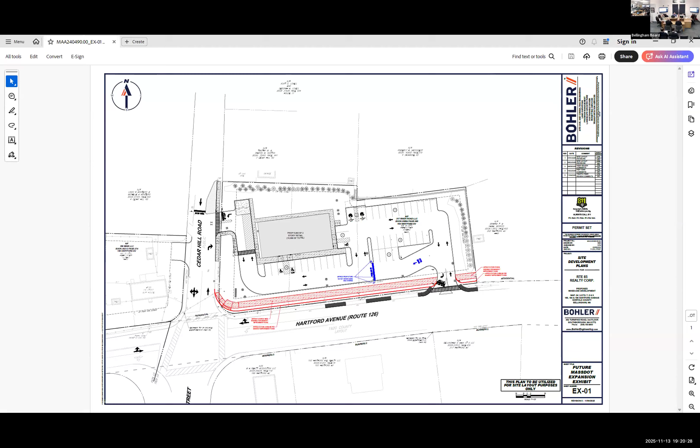So I think one of Bob's concerns was, if we'll call it the red, and that future gets installed, it becomes a tight turn if you were traveling from plan left to plan right to then exit the site. That would be kind of a hard hairpin to do.

So at that point, without making any real changes to curb lines or anything like that, we could simply direct that section of road to be one-way traffic. You'll see the arrow in blue, and direct any cars that need to exit around in a clockwise direction, which could be done simply with paint striping and signage.

We don't want to do that now as the site exists, because it doesn't make sense, and I don't think people would listen to it now, because it's more natural to go straight. But we just wanted to show that in the future, if that was widened, we have the ability very easily to add striping and signs to make that traffic maneuver easier.

I'm sorry, why wouldn't you do that now? Because I think people wouldn't listen to it, to be completely honest - it's inviting when you go that way and you have a wide area for a turn. I think it would confuse people, and you'd have some people frankly going against the one-way traffic. Whereas in the future, when that roadway is widened, it's a difficult maneuver, so it's not inviting at that point.

Yeah, and I'll add to that as well - right now we have the proper queue that's required. I believe Bob would agree with that. Jason, do you want to touch on the queue aspect?

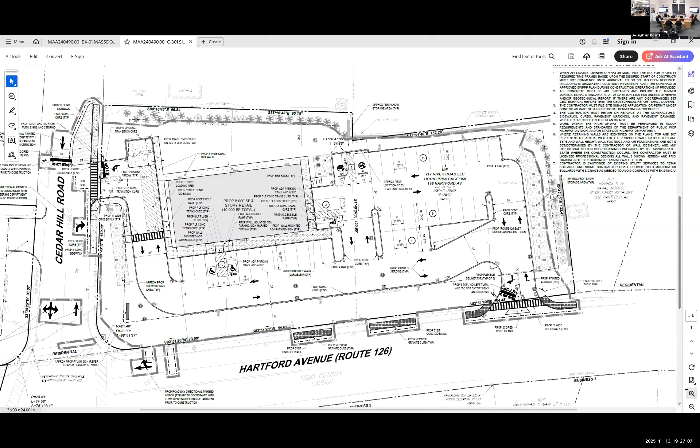Can you expand on the bollards you want to put in the road, in the island? Yes, so that's the right in, right out. There would be those plastic bollards, you'll see them on the side of the road — I think you see them in Hopkinton right now. That would essentially prevent people from cheating, saying 'I'm just gonna hop over this thing,' because they're hitting a piece of plastic. An emergency vehicle, if they needed to get through there, they can get through it. So that's what we would propose to put there — kind of a belt and suspenders, another belt.

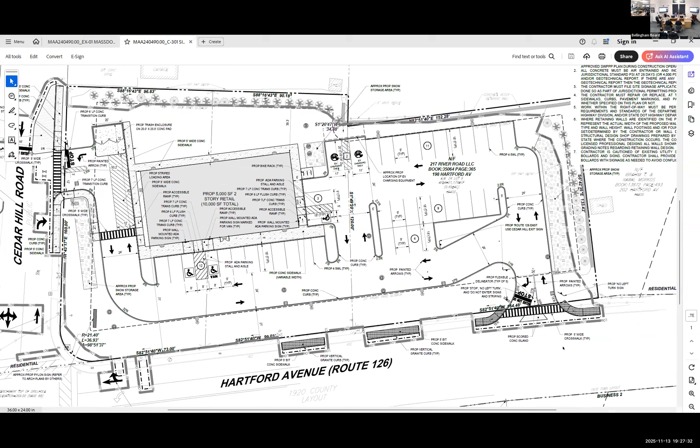Coming down Cedar Hill Road — it's one-way right now all the way through. You want to make it two-way for approximately how many feet? Probably not the exact number, but a ballpark, I'd say it's probably about 150 feet, give or take, somewhere in there, depending on where you measure from.

So if you're living on Cedar Hill Road, when you're coming down, how will the geography of the road change for your vehicle? So when you're living on Cedar Hill, coming in the direction you come in today, heading towards Hartford Ave, the traffic flow won't change at all. If anything, it will get constricted, but it'd be more to what I'd call normal size for a one-way road. I think Cedar Hill right now is sized as if it was a two-way road, which makes it a little bit confusing. I think it was at one point, then it was changed, but the geometry never changed.

So there would be a throat that would throttle down from that two-way width, over a certain tapering distance, that would allow you to go to a one-way width of 16 feet at that cross point, which really directs traffic in one direction and also acts as a mitigator from a speed standpoint — people won't be flying down there if you have something there to prevent you from doing so.

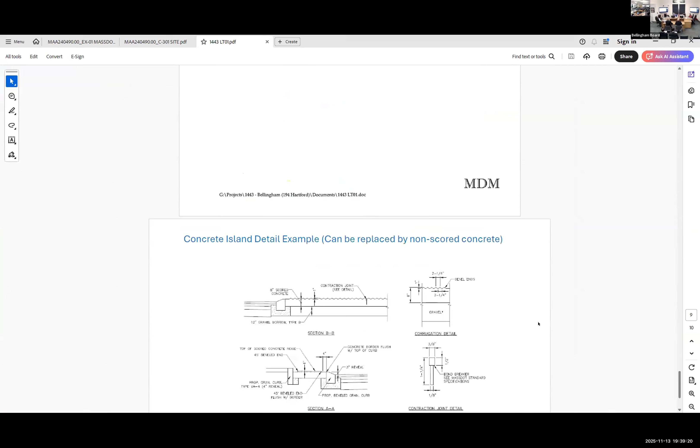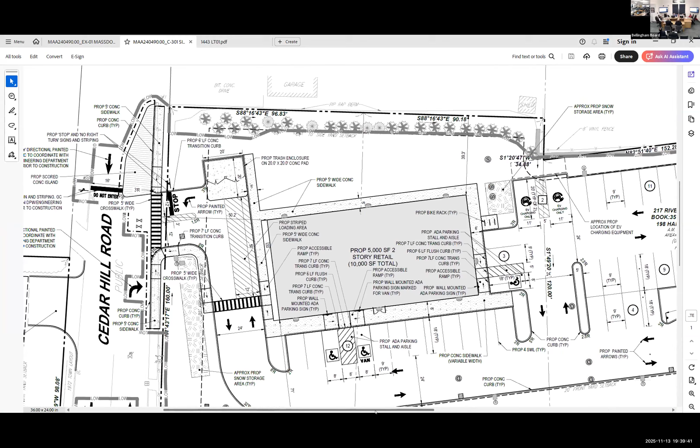Yes, all right. So let me go back to what we were discussing, which Bill, I think you were alluding to with your questions, was how Cedar Hill Road will operate. This is, I think, just more of a review, because we've discussed this, but essentially this is the proposed curb cut on Cedar Hill Road for the applicant's project, where my cursor is.

This would be a left turn only out of the site, with a full access entrance here. The issue becomes really right where the curb cut ends, which is where you want the entire rest of Cedar Hill Road to become a one-way or remain a one-way. Now, it's a very wide street as a one-way. So the discussions between myself, DPW, and public safety were about how we can, number one, deter people from going down the wrong way, because if you put signage up, signage doesn't necessarily work all the time.

But we also wouldn't want to put up bollards or a guardrail, because public safety said if there's an issue down there, they could go down the wrong way of Cedar Hill Road if they had to respond to something, and they would prefer to still have that option. So the question becomes how we can deter people but also allow passage for emergency situations. What we discussed was a raised island, not a flush one as initially discussed with a scored concrete top. It would actually be raised, but with a 4-inch tall sloped granite curb with a concrete treatment on it.

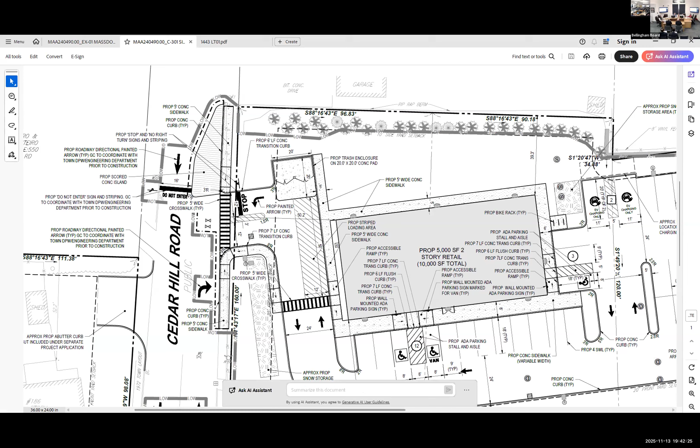So that's where that stands, and Bob actually had a nice detail of this in his peer review letter, and I think the applicant's in agreement. Yeah, I think it makes total sense.

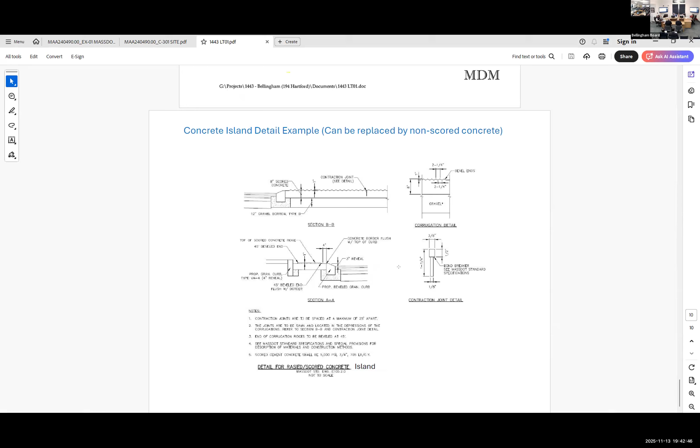Something you mentioned, Rob, about having to go to the select board on this. Bob, could you let Bob share, and I'd like him to bring back his findings with the DOT on it? Because I'm going to make a recommendation - I know I'm going to be hated for it, but I don't care.

Okay. Is that clear? Do I need to zoom in at all? No, the one with the different colors? Yeah, oh that's - yeah Rob, I think, oh, me. Yeah, sorry. That's okay.

That one, yeah. I was looking for - wasn't there three lanes on the eastbound side of Hartford Ave? It was the westernmost portion contemplating the DOT improvement.

Okay, Bob, you're up again. Yeah, I think you're referring to where Rawson Road has a third lane, which was a dead end. Correct. Yeah, I think I know where you're going with this.

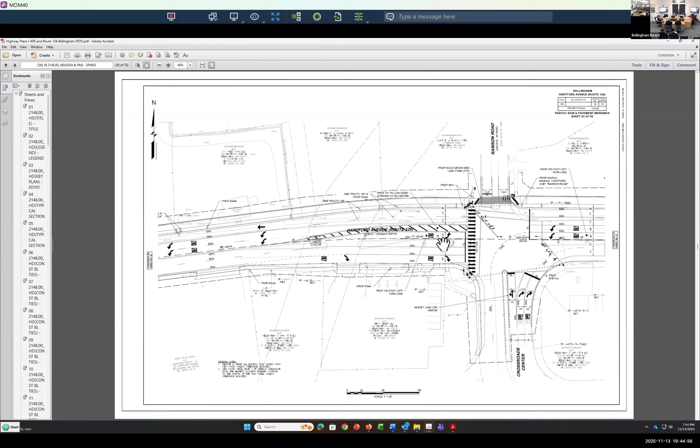So my question is, being that this property above is the new proposed bank, and the curb cuts - why not widen the road on that side of Hartford Ave, west of 126, to get the three lanes even in the interim? So you'd have a left turn only lane, you still continue, and now you're not creating havoc on eastbound traffic. You're taking back away from the road that's already going to be taken away when MassDOT does it, and yet we're not impacting the townspeople and screwing things up when it's going to get changed anyway. So widen the road at the beginning, because I know most of the select board people are going to have very strong opinions on the traffic flow as it is, so be proactive about it - do that side on the front end.

I don't envision that - if the Cedar Hill Road vote occurs, I'm sure it would be conditioned on improvements to this intersection regardless. But to your point, I think if the DOT improvements do occur, a left turn lane obviously has to be looked at because of the two left turn lanes going the opposite way. But talking about the interim, your points are completely valid, and I think it just requires a little bit more analysis from the applicant, and that needs to occur once it's discussed.

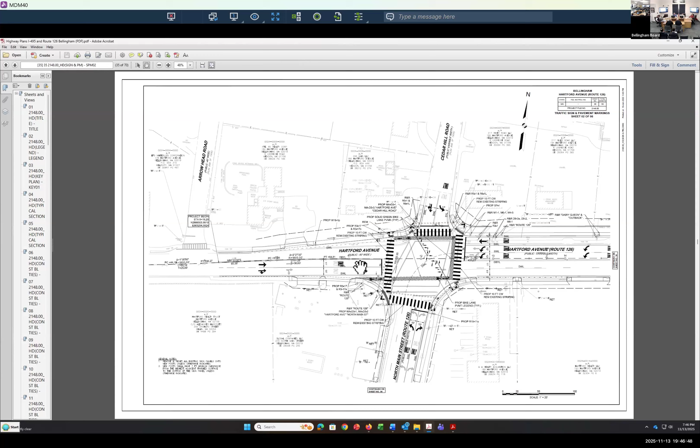Because the westbound traffic has a left turn - the east should have the left, and if the property is available to us now, widen it to make that third lane, to mitigate the traffic concerns. That's a terrible intersection already, regardless of whether we have two left turn lanes from the westbound side.

Or not - yeah, no, I think that's fair, and like I said, I think it just requires a little bit more analysis on their end to figure out what the best solution is for the interim.

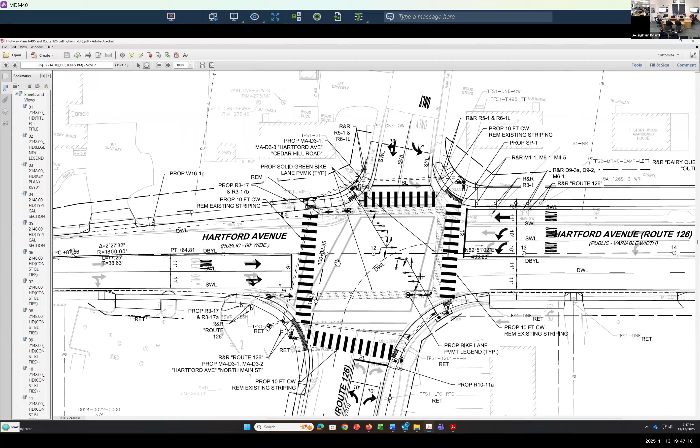Okay, all right, I guess I've got some comments. Can you bring up the colored version, Rob, that you had?

So I remain concerned about the transition plan between what we've got now and what would happen with Hartford Avenue. We've all talked about the fact that there's a lot of hurdles that need to go through—not necessarily people in this room, but a lot of hurdles for that Hartford Avenue piece—and I don't want to speculate on the funding and all this and the timeframes of when that's possible. But I think we need to have a plan that is capable of handling it now and capable of handling it in transition.

And I guess what I'm trying to understand here is the entrance and exit over on the east side of there. If the takings happen with Hartford Avenue, you lose a lot of that frontage. But you're not proposing to design to the design you're expecting if Hartford Avenue gets improved. At this point you've got a larger, slightly different design there. Is that correct with the flow inside? Or is it the same flow inside that'll be either way, now and in the future?

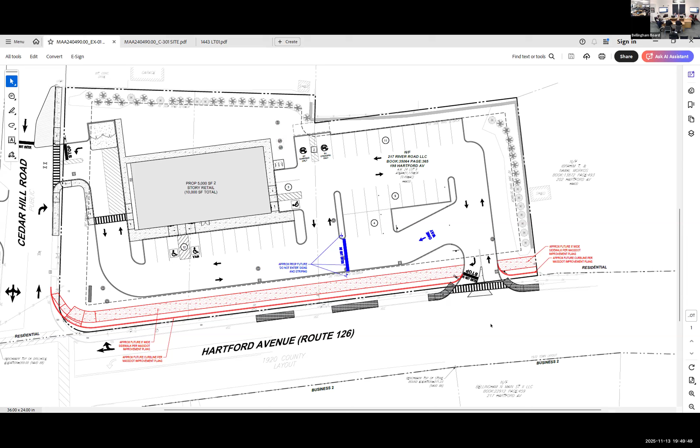So the parking lot—I'm concerned about the current queuing coming in, if you're coming at speed going west on Hartford Avenue, then you take the entrance on the east side of this design. Have we looked at the flow into your facility from outside, looking at the traffic queuing? Because right now there's a lot of queuing in that area, it backs up all the time. So, Bob, have we looked at that at the current spot right now, and then in the future?

Yeah, so I'd also be interested in your comments about the two-way coming in and out of there. I'm questioning whether that should be two-way now as well as in the future, because if we train our customers to come in and exit that entrance, if something changes in the future, it's harder to change behavior then than it would be now.

Yeah, I think what we've requested is that they simply show the striping, the signs, all that would need to be in place in that future built condition, so that we're clearly understanding what that all looks like. And there's a possibility that there may need to be some changes within the property itself.

So just to illustrate, where they're showing the right turn only arrow on the driveway, and then the stop bar—that stop bar is going to have to be pulled all the way back to where you see the dashed line cross the driveway. So, Rob, you see that dashed line that crosses the driveway? The stop bar, where it says stop, has to be pulled back all the way to where that dashed line is once the MassDOT improvements are in place.

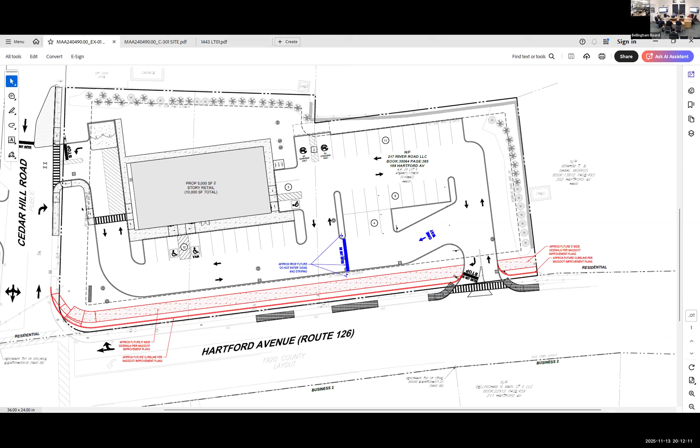If you can come back, not five times, just one time, that's what I'd prefer. I thought we were going to, I know there's been a lot of discussion with you and peer review, and I think you guys are working in that direction. There's still some more concerns on both sides from what I think I've heard, but I think we need to see the next iteration of this.

Understood. I just want to repeat back so I understand what I'm coming back with. So on Cedar Hill, people generally understand two-way makes sense. There's a little bit more analysis that the peer review asked for. You wanted to see something that'll work now and in the future.

Yep. I want to see that on the Hartford Ave Drive, under the existing conditions without the widening, the changes we made there without the widening, whether people are comfortable with that. 'Cause I'm hearing you're more concerned. I am concerned, so I'm looking to see the full design there.

If you're putting in bollards, where the bollards are, what you're doing, what the signage is, I want to see it, because right now if I saw this design, I would say people would be trying to go the other way. I think I told you last time, on the other side of the road, I've had cars cut in front of me to do that twice in the month before our last meeting. I can see that the design is angled out, but I'm still concerned, so I'd like to see that developed, if that's where you want to go.

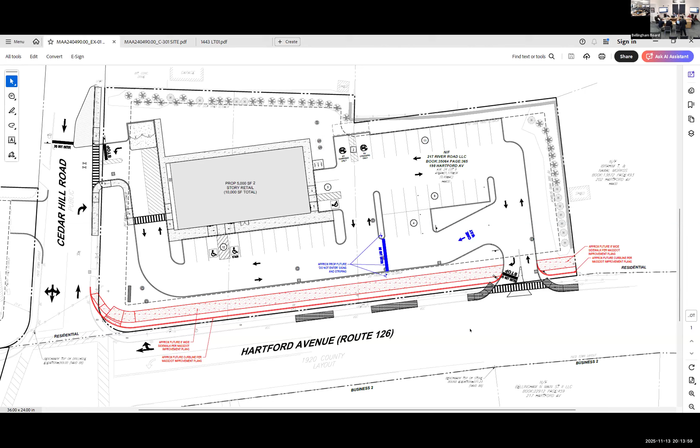Can I just ask, Mr. Chair, because the plan, one second, oh sure. Yeah, Rob, do you have the plan that actually shows the existing condition and what we're proposing, showing the stop sign, the signs, the bollards? And if we could zoom into that corner, C301. Yeah, this is the one that was just sent.

That's why I want to make sure we did make those changes, and that everyone's comfortable with those. I understand you want more detail when things are widened. I was just trying to clarify if there's something different you wanted to see.

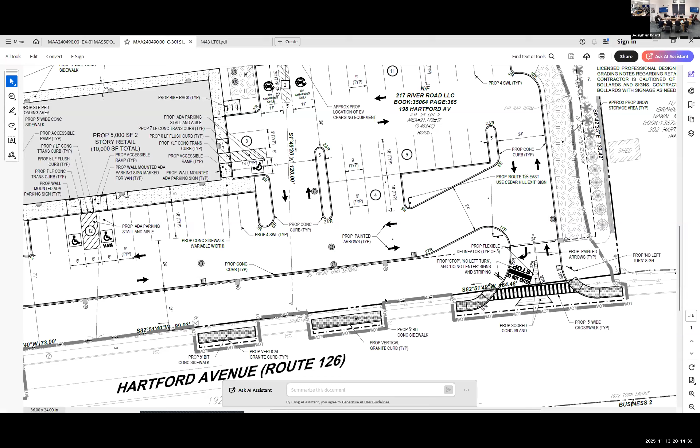Well, I guess I'm not sure why there would be two. This is the design, one, right? Because the road's completely different, you're tying into a different spot, but you're in your facility though.

I guess my concern, this member's concern, is that you wouldn't want to have to redesign your entire location if this comes up 2 years from now or 10 years from now. You want to be flexible there, right? So that's what I'm concerned about, that the concerns I heard from Bob are incorporated into this.

Yeah, I can show more detail in the future. Without a doubt, I understand your concern. I can absolutely do that.

They're not going to be the same because you're adding a new lane of highway. It changes, so stuff is going to change. We try to keep it as similar as possible, but there has to be change. It can't be the same thing for both because it's a completely different scenario.

Which I understand what you're kind of hoping to, it just doesn't unfortunately work that way. So that's why I'll show you both so you can see them side by side, but it won't be the same.

Okay, I just want to make sure with what we're showing here that we worked with peer review and incorporated their comments. We think these addressed what we heard pre-widening. I just want to make sure I'm correct, and if I'm not, I need to make some changes.

And it does show the location of the bollards. So as you look, there's bollards in that striped island, just to prevent anybody from turning further in there, but it allows room for fire access.

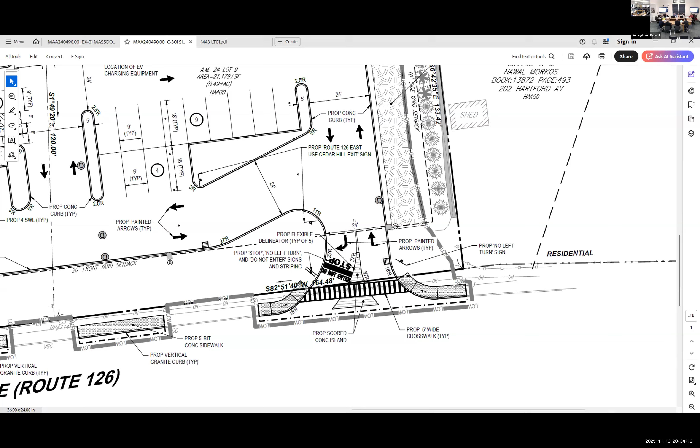You got that, Marty? So moved. Noted, just say so moved. So moved by Marty. Do I have a second? I'll second it. Second by Bob.

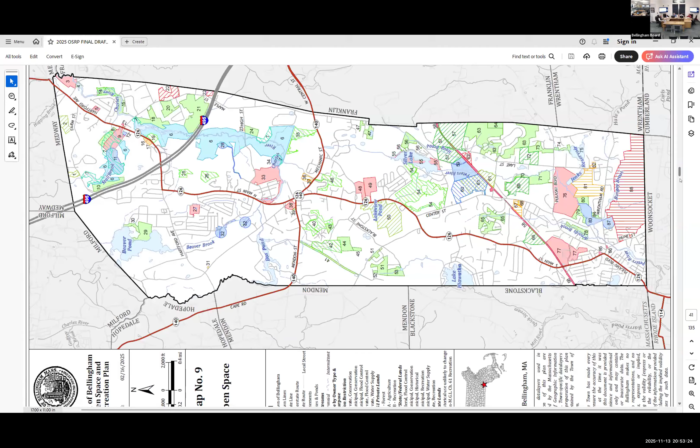Just to quickly go over the stuff that's kind of relevant to the planning board, because essentially the open space committee, this goes to the select board for approval, but typically the planning board, conservation commission, and maybe the parks committee, they'll actually give a recommendation on this. That's what's been done in the past. So that's why it's in front of you tonight.

So essentially, the big things with this is, I'm sorry, I can't get to... sorry, page 47, I'm going the wrong way. I apologize. You can just type the page number into that box on the right. Yeah, that's okay, I got it. We're here. Anyway, I'll be very, very quick.

Basically, open space goal and recreation goals, the critical items in there were just trying to make the open space areas more accessible and inclusive. That way there'd be more community involvement in these areas.

For the analysis of needs, this plan noted that there's been substantial growth in Bellingham, as we all know. So essentially trying to acquire more open space and also being able to analyze and maintain current assets are really the critical needs for this assessment.

And with that, for the community needs as well, there's a lot of discussion in here about accessibility for the open space and recreation areas that we have. Later on in the document, there's an appendix that goes over all of the highlights of the ADA compliance with every single town-owned recreation facility, and it just goes over what's there, how it can be improved on. It was a pretty heavy lift, that's at the end of the document.

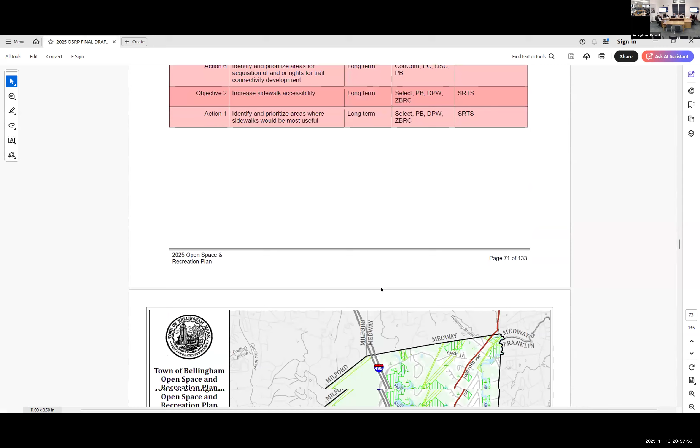Right here, so increase sidewalk accessibility and prioritize areas. There's been a few projects where we've required mitigation funds specifically for sidewalk improvements. There's been projects where we've required complete renovation of sidewalks as mitigation, either along site frontage or, in some cases, adjoining neighborhoods that connect to open spaces.

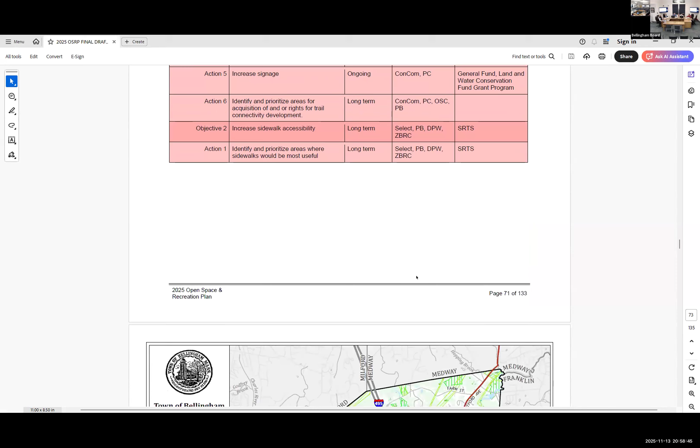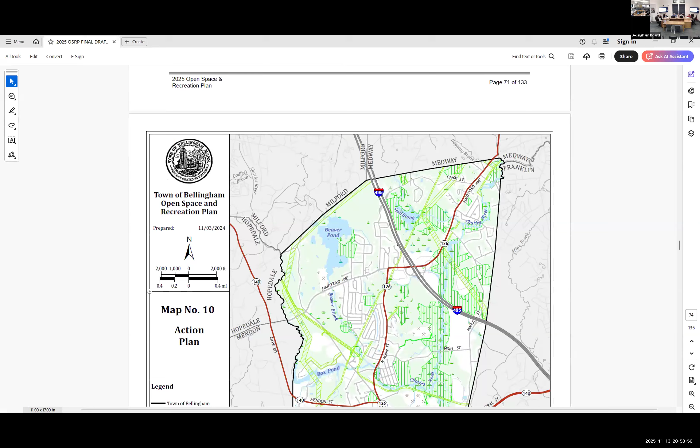So it's nice to see that you've listed these as objectives that you're already doing, so two thumbs up for the planning board. That's pretty much the overview of what's related to the planning board in this, so I can go into more detail if you want. I think there was one question, I forget who asked it, related to the CPA, which the previous rendition of this had a lot of narrative on, but because it's a select board initiative, it would have to go through the select board. It's listed in here as a potential fund, but there was no goal specifically to create the CPA. But I envision that will probably be a discussion coming up in the future. So, yeah, anyway. Thank you.

You're welcome. So the open space group didn't have a firm position on the CPA that needed to be driven? Well, they initially did. The only issue was...

I will tell you that there was a public hearing related to the survey that went out, and that was just public input on first discussing the survey results and also getting public input from residents who had questions, comments, concerns related to this plan. And at that hearing, there was a substantial amount of discussion related to CPA. The issue was, the open space committee, they're not there to promote CPA. They're there to get this plan drafted and approved. CPA will come at another time from, really, it's the select board that would have to initiate it.